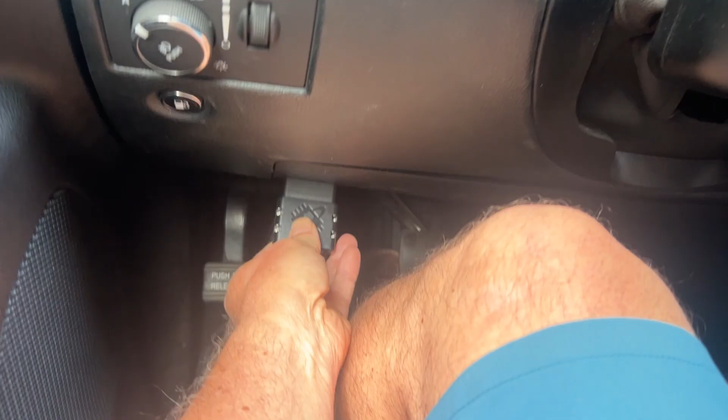Disclaimer, look this up for yourself, find the right one for your vehicle. When you get it, I expected a larger thing, but all it is is this, and it basically plugs into the little port underneath the steering wheel. Most cars have them down here.

I'm not going to put it in right now, but you'll find the port down there. Just plug it in. All right, there it is, plugged in, and for the first time setup, there's a small button on the bottom left. Press that button, it's right underneath the O letter, and that'll put the device into pairing mode for Bluetooth. Find the device on your phone.

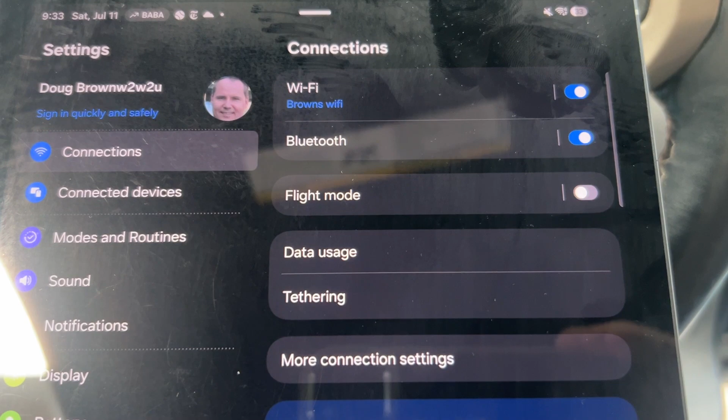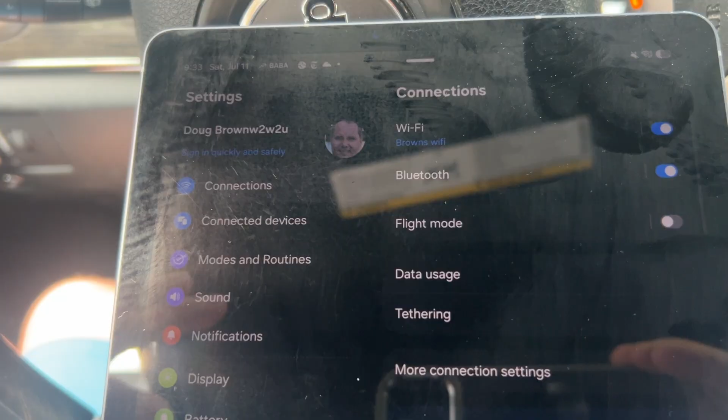You can read the device from your iPhone with the iOS operating system, and you can hook up to it, but you still need an application to access the ECU, the computer on the car. That application is a separate one that doesn't come with this device. You have to buy that separately, and I'll show it. Unfortunately, that application only runs on Android or on Windows if you want to connect to your computer via Bluetooth.

So I'm connecting here to my Android tablet, and let's see if I can find it in here. Find the device. There it is, OBDLink MX, whatever. Press it, and I'll connect to it, and I'll be online.

And then what I'm going to do is run the application that I use to start the manual regen. You can see the car's running right now. The instructions ask you to get the car to a warm temperature, because when you do the regeneration, the engine's going to ramp up to 2,500 RPMs, and it's better to have the car warmed up.

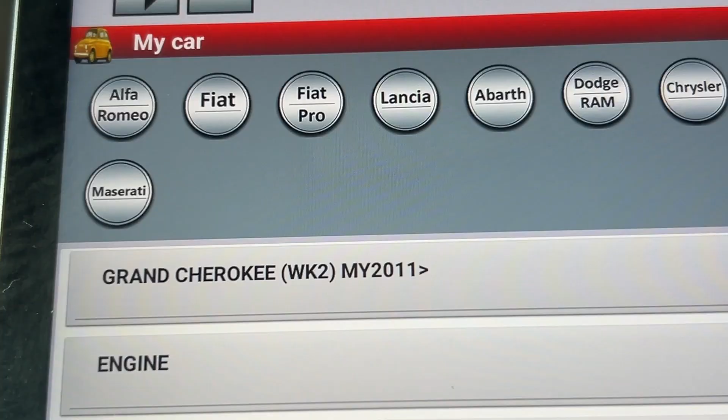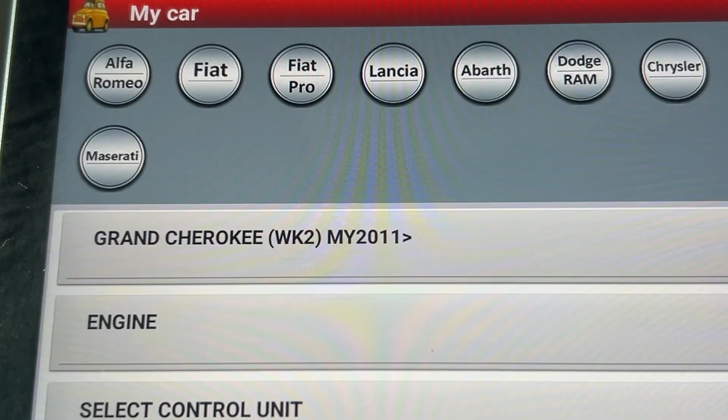The application that I found to purchase was AlfaOBD. It's my webcam going on, and I paid for it. It was talk about money. That device that I just showed you before cost me a couple $100 Canadian, and the application, this one, is $50 US. So the whole thing, all in, taxes in, 300 Canadian, which would be 220, 230 US.

The first thing you do is find your vehicle. You can select it through these drop downs here. Just go through and find your make and model. I'm not going to show that.

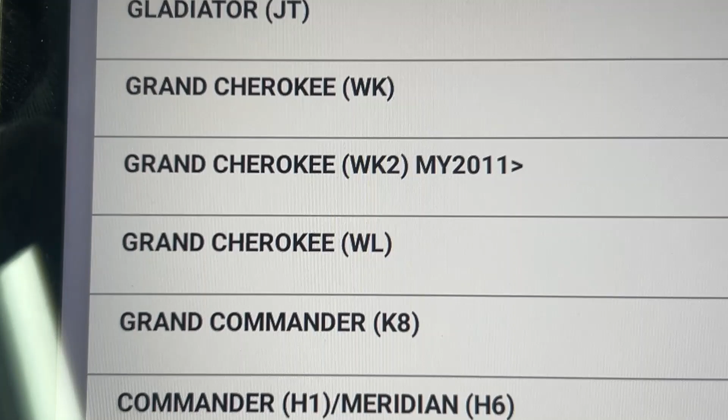Actually, I am going to show the make and model for the Jeep, because the application is not completely up to date with all the different models that are out there. So I was confused by this one, the Grand Cherokee WK, WK2, etc. I used AI. I just went on and said, here is my specific car, and I might even put the VIN in to say which car should I select in the AlfaOBD application, and it told me to pick Grand Cherokee WK2. It's fine, so I've done that.

And then you get to the point, select function. What do you want to do?

This is where you're going to want to do the manual regen. So you select the function, and there's all this stuff in here so you can control all aspects of your car, do whatever you want, or take a look. But I'm going to go to the engine and select the control unit.

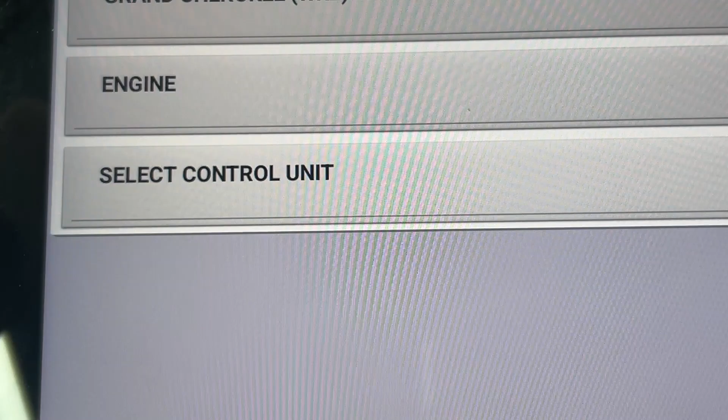My car was specifically not in here. I looked at AI, and it said to pick the one with this Italian engine, which is not on here. So I said, okay, that engine doesn't exist on AlfaOBD, what should I pick? And it said pick the EcoDiesel Bosch EDC 17. So I picked that one — that's the engine control unit.

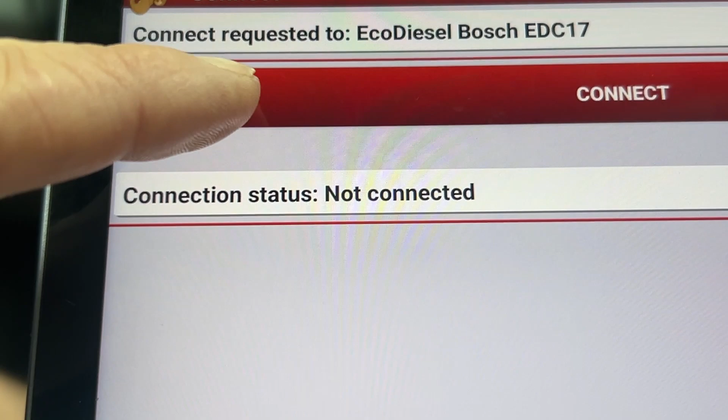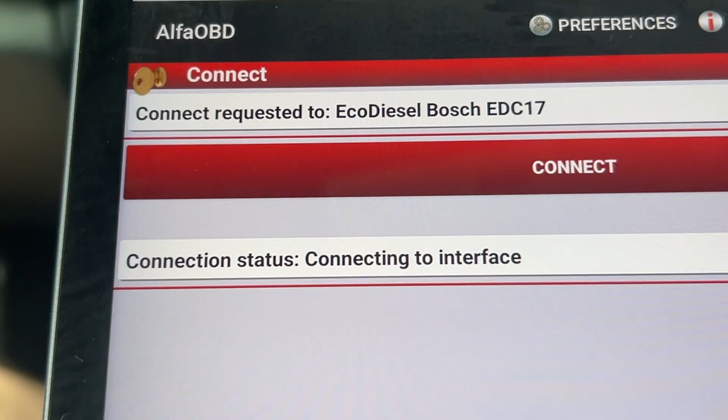Connection not connected, so I need to connect now. Just do that, and it's connecting to the device, the OBD — it will do that momentarily. It's connected, great. And of course, as I showed before, you connect your device to the Bluetooth connection for the device down by the steering wheel, and then your app connects to the device, which is what we're showing here.

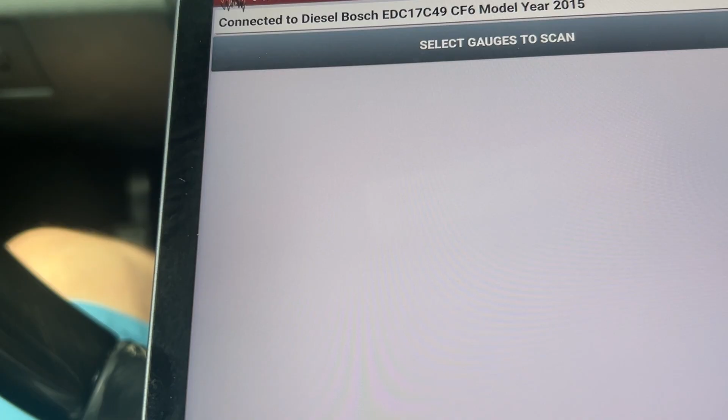On the bottom of the screen — and this wasn't clear at all — you can set up some graphs. Do that first. You want to set things like RPMs, track the engine temperature — or actually not the engine temperature, but the temperature of the exhaust coming out of the diesel chamber. You can also show a graph of the percentage of soot level in the chamber. So I'll go through and pick those.

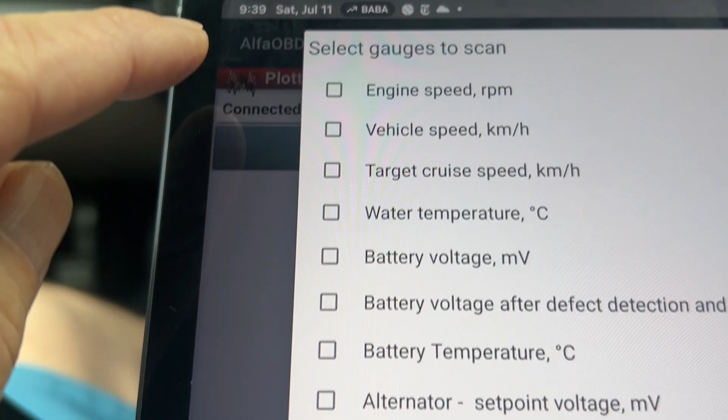So I'm picking here — select the gauges to scan. You just click this, and everything comes up. You can pick whatever you want; I picked ones that were interesting to me. Engine RPMs, I wanted to see that. Water temperature, I think that'd be the coolant temperature — I'm interested to track that. And you can see all the other stuff in there.

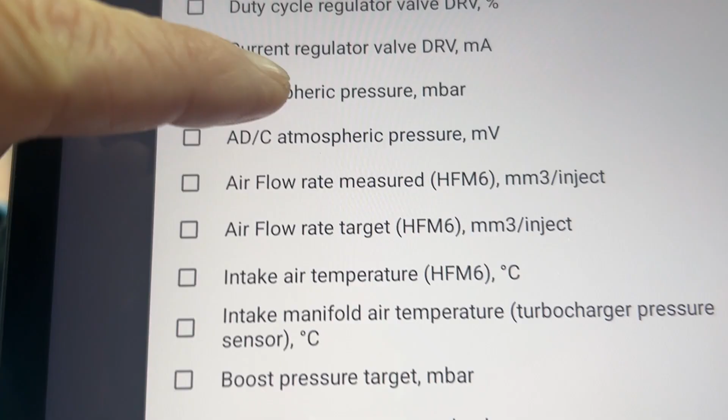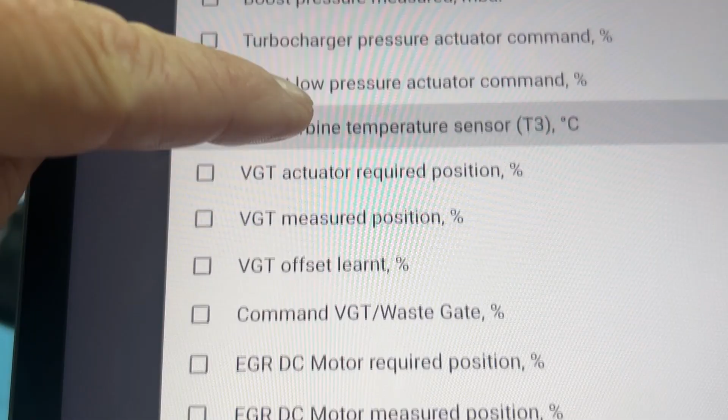You can see, if you want, you can get super detailed on all kinds of things, depending on what your problem is. I'll take intake air temperature, why not. I don't know what most of these things are, in fact.

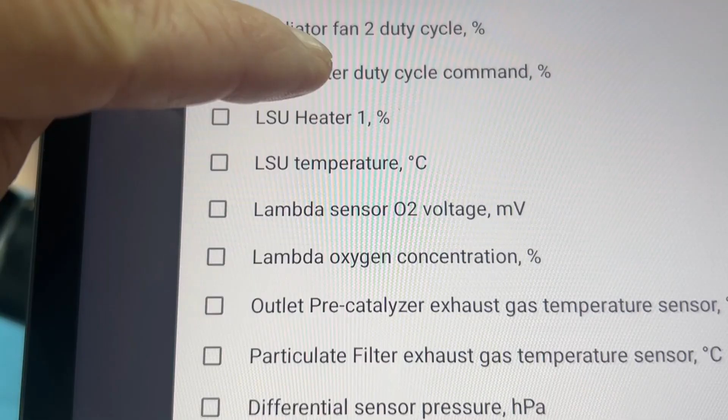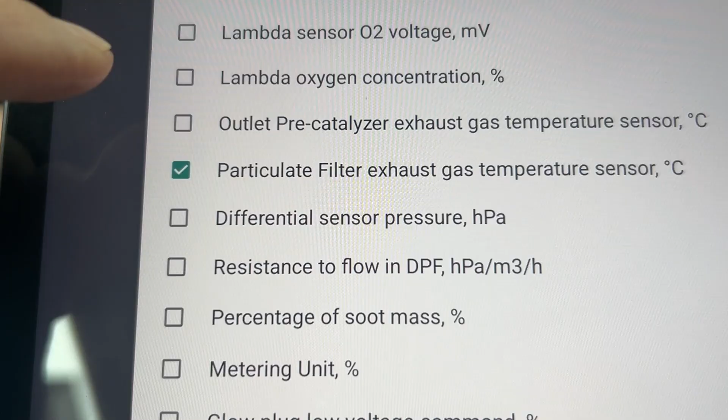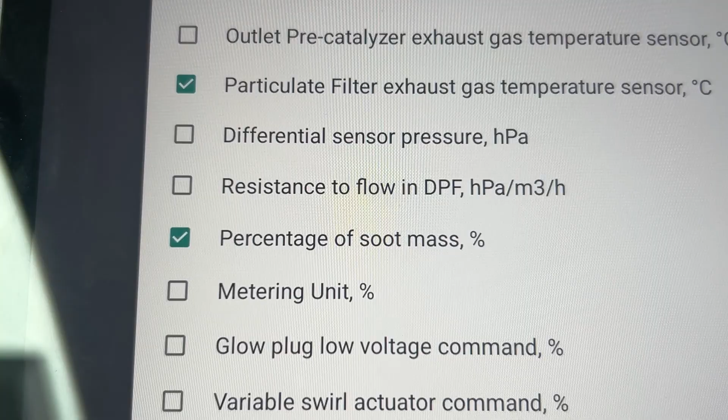Okay, particulate filter exhaust gas — that's going to be the temperature, not exactly of the chamber, but the temperature of the gas coming out, which you could say is a proxy for the temperature in the chamber. And then there's percentage of soot mass, which should be the fill rate of the chamber. Okay, when you're done with that, just hit okay at the bottom.

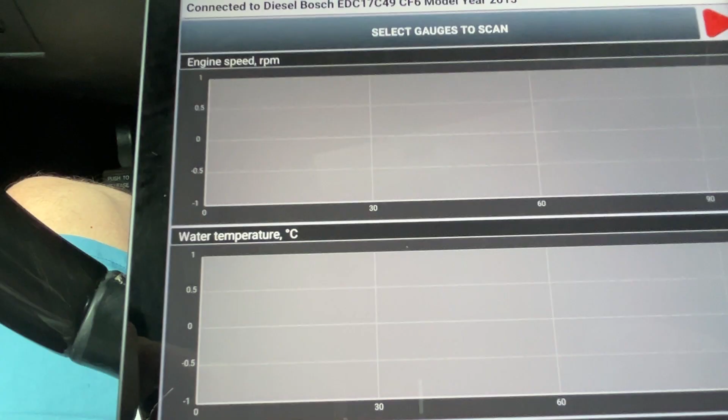All right, and there are the three graphs. When you start the regen, these graphs will fire up. What you want to do is, there's the graphs there — this is the actual procedure you're going to run, so press that, and that will bring up this menu.

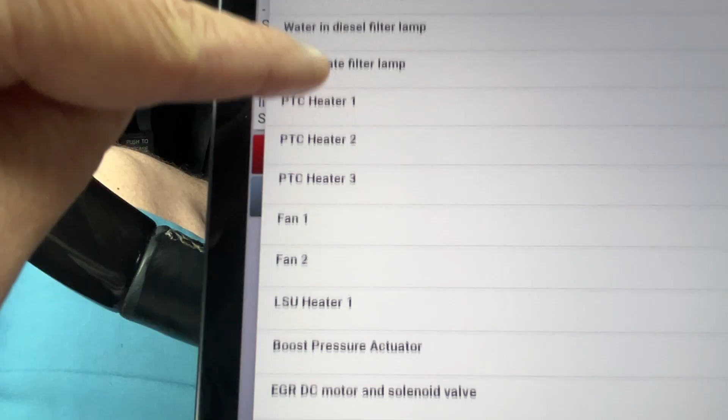So what do you want to do? Select the procedure to start. We're still on engine, so you can go through all the procedures you can run on your engine. I'm going to look for one that relates to the regeneration. There it is — DPF, diesel particulate filter regeneration enabling.

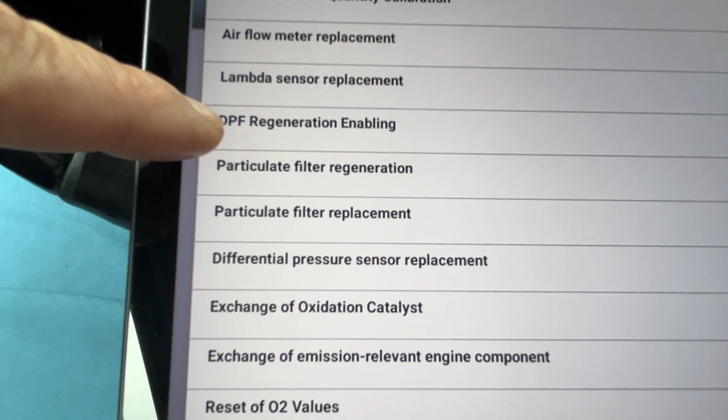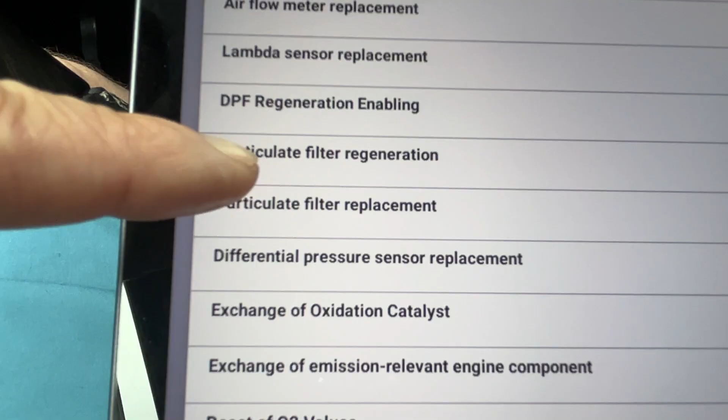What that's doing is setting your car to automatically burn off the soot, so that should always be enabled. And there's particulate filter regeneration — that's the one I want. Then start. The car is warmed up, you can see the temperature approaching normal running temperature, and let's see what happens when I press start.

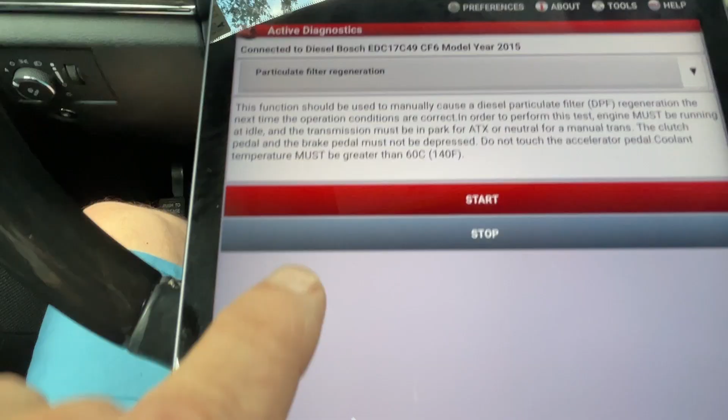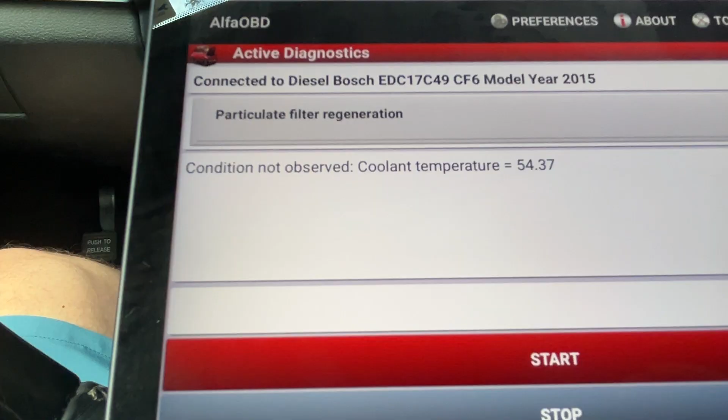Condition not observed - coolant temperature is not warming up. So I've got to let this car warm up even more. Back to the gauges, I'm going to start the gauges up. You press the little arrow.

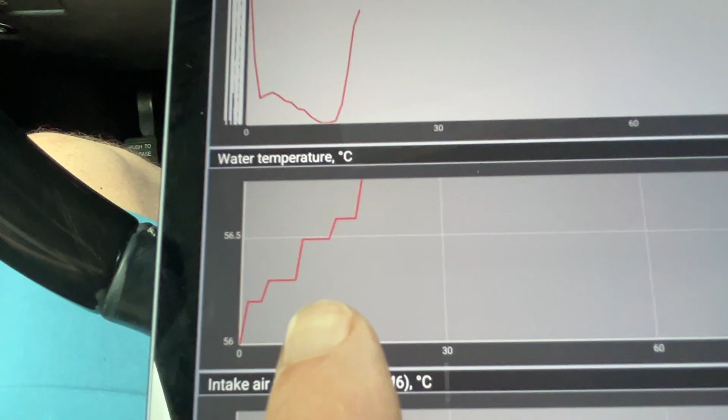And then I should start to see some numbers. So I want the water temp - I'm thinking the coolant temperature is the water temperature over here, and you can see it start to roll up. I pressed the gas pedal. You can hear it going up, and you can see the water temperature increasing.

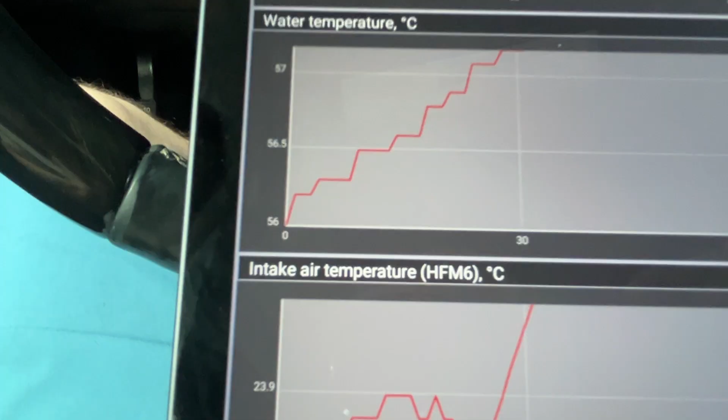Let me see, it's at 57 degrees right now. I've got to get it up to whatever it said before, 54. I think I'm high enough right now.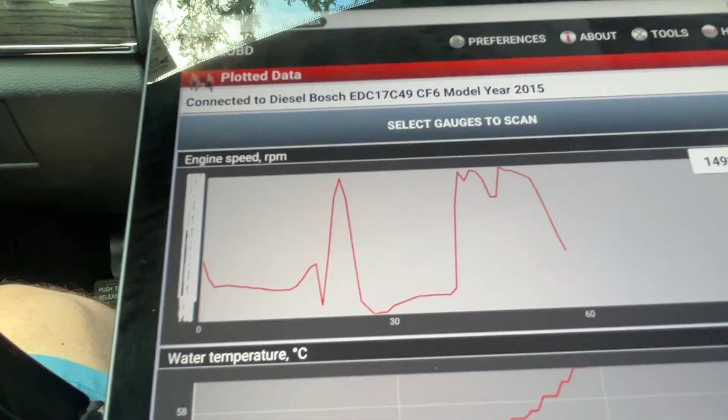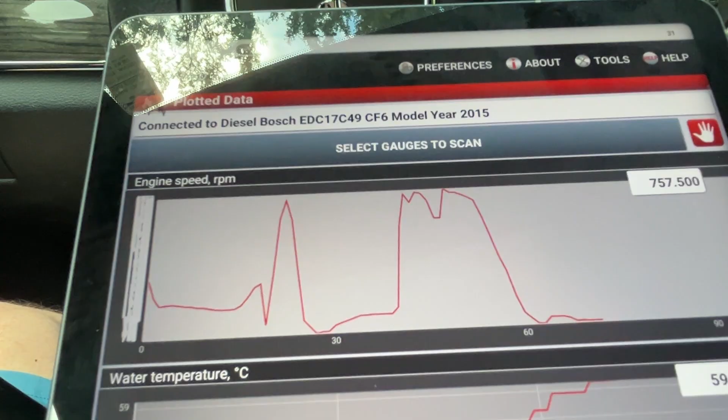Just out of interest, there's the RPMs. I'm pressing the gas pretty hard right now and getting the RPMs up to 2,500. When I'm not in gear right now - when I am in gear on the highway, I found I don't get it up to, I get it to about 2,000 RPMs when I'm at highway speed. So what you could do if you wanted to do this manually on the road, drop the gear down to a lower gear so the engine's working harder, and that'll get the RPMs up if you want to do that.

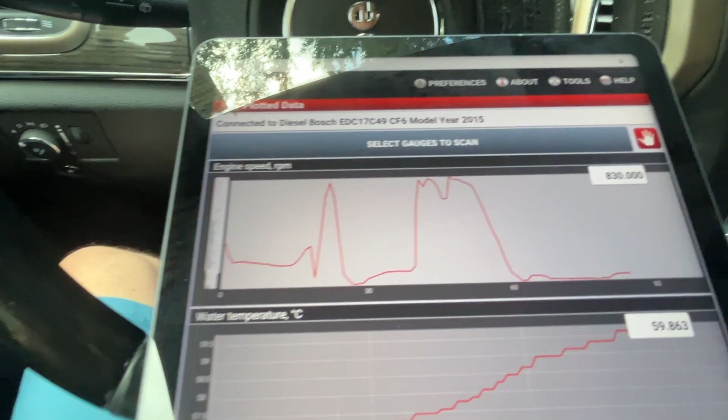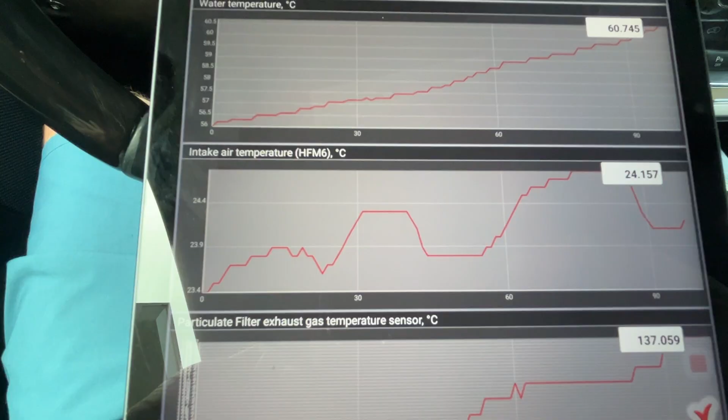Anyways, there's an example of the graphs. So engine speed, you can see as I crank, put more diesel into the motor, the RPMs increase. You can see the temperature going up. The intake air temperature has gone up a little bit. You'd think it would be flat though, because it's intake air coming in.

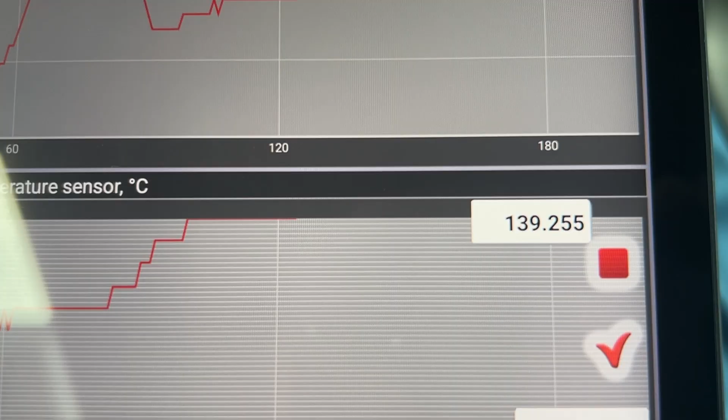And there's the particulate filter temperature. This is going to get - it's right there, it's 139. It's going to get really hot, actually, when you start the regen, because the engine will heat the particulate filter up, and when it gets hot enough, it'll be like an oven and just burn the soot off.

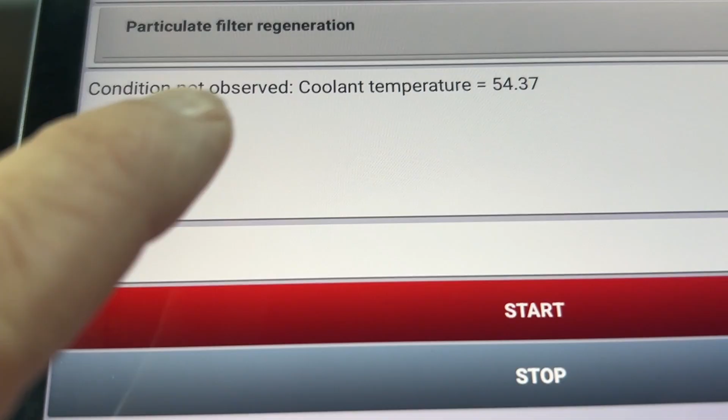All right, I'll try this again. I'll take my foot off the gas pedal. So the condition was not observed before - the coolant temperature was too cool. I think it should be hopefully warm enough now, but this sensor will tell me.

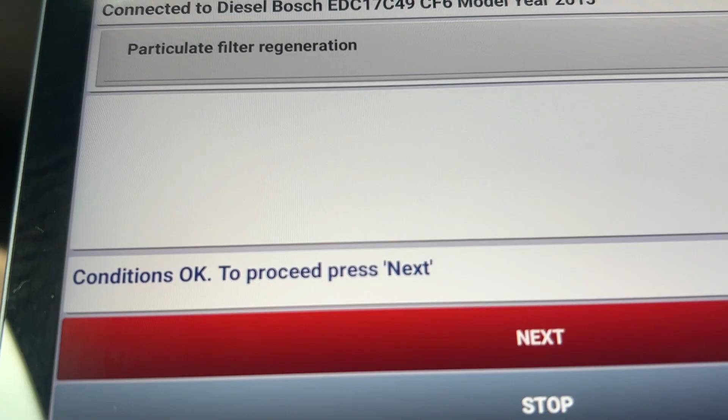Conditions okay, press next to continue. And then you can hear the engine ramp up. There it goes. So that is the application taking control of my computer and increasing the RPMs, and hence the temperature in the particulate filter chamber.

So this is going to run for however long it takes, 10 minutes, 15 minutes, 20 minutes. And when the soot level is reduced, the engine will automatically reduce in RPMs, and you can tell that right away. Yeah, it just really cranked up there to 2,500.

Going back to my menus, I'll go back to the graphs, and you can see there's the engine RPM speed. Water temperature continues to go up. Intake temperature continues to go up. And there is the temperature of the particulate filter. You should see that continue to go up, actually.

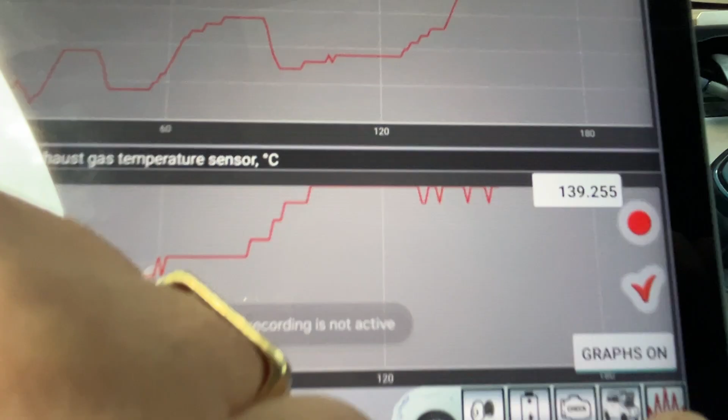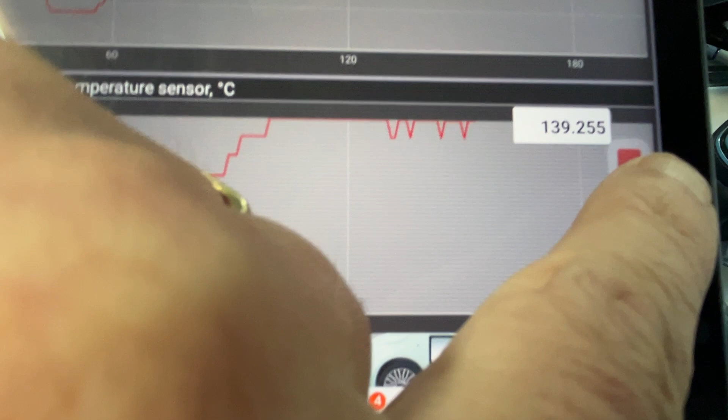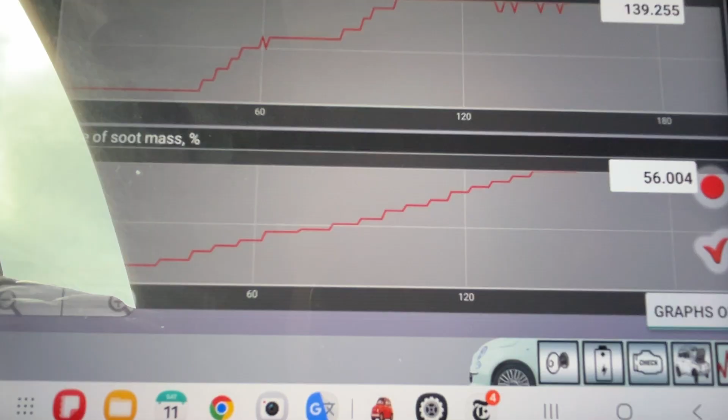I don't know, honestly, I don't know what I'm doing there with these flashing things. I'm just wondering why it's not - oh, data recording stopped. Okay, I was recording there. I was hoping to see the graph of this continue to go up. I'm just hitting the plus minus thing.

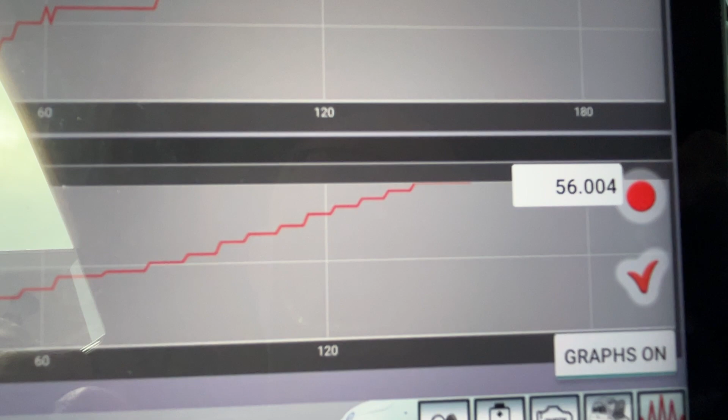Oh, that's the percentage of soot mass. So it's at 56% right now. And when I did this before, I did not see the percentage go down. When the engine RPMs went down to normal and the burn off had completed, this went down all in one go to 10% or something.

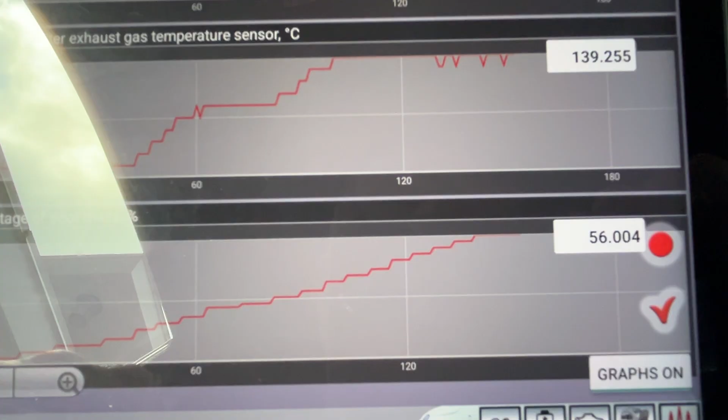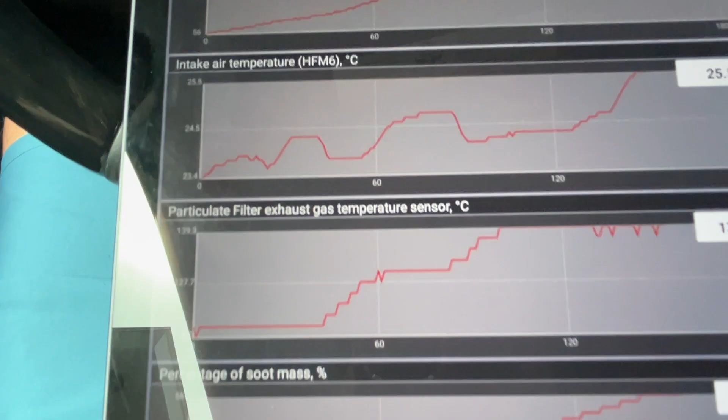And then I actually did this a few days ago, and the particulate warning came on again to drive at high speeds in the engine. So I'm doing this just 3 or 4 days after I'd done a manual regen earlier. So I might have to do this a few times before it's working.

Okay, so there's - and the engine speed does not appear right. It should be 2,500 RPMs. So unless this reading is out of sync somehow with the car, that does not look correct to me.

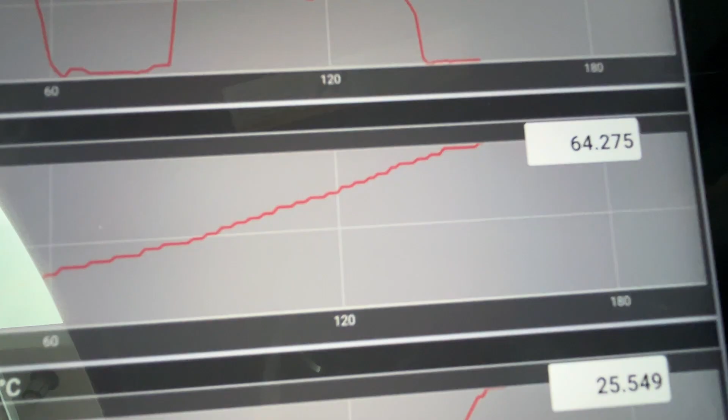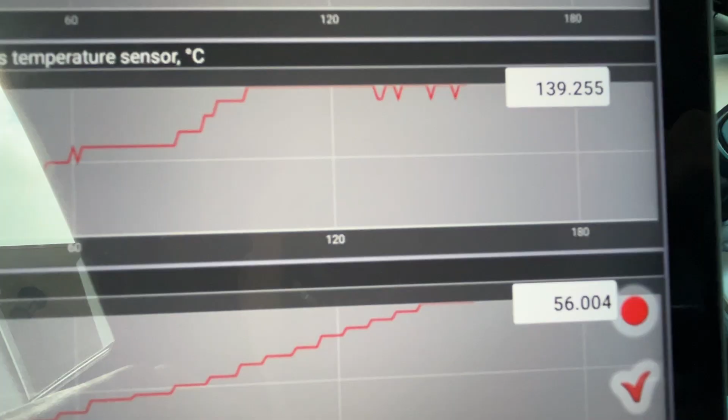I don't know why. Water temperature continues to go up, and then it'll peak out at some point. Intake air temperature kind of seems to have peaked out. The temperature of the chamber - it should be getting a lot higher than that, actually. I'm just pressing the on-off button on the gauge on the top.

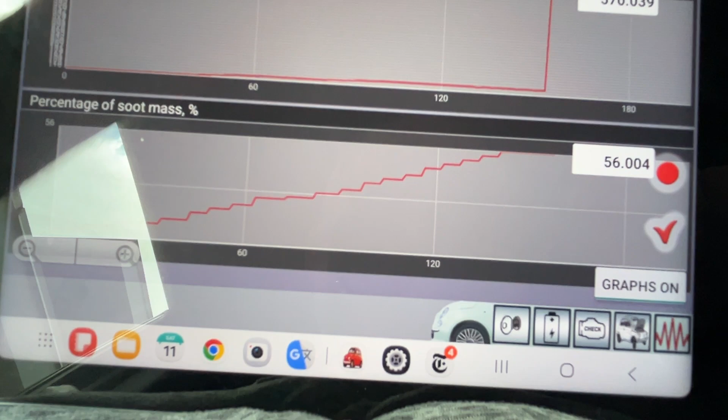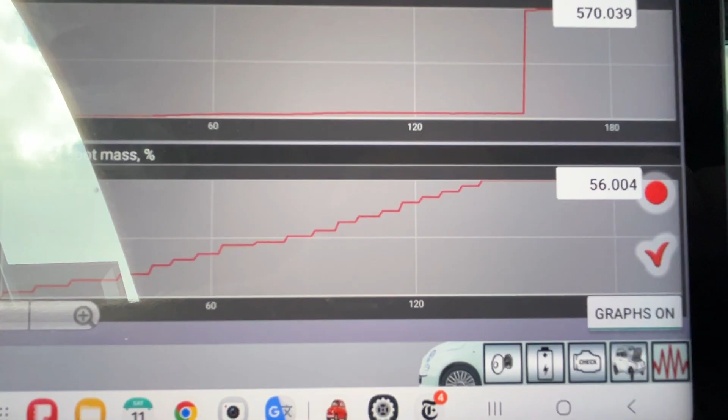Anyways, I can't explain that. It should be getting a lot hotter. I'll turn this off until the procedure's over. Just out of interest, the RPMs did come up to exactly what it reads on the gauge on the car, 2,500.

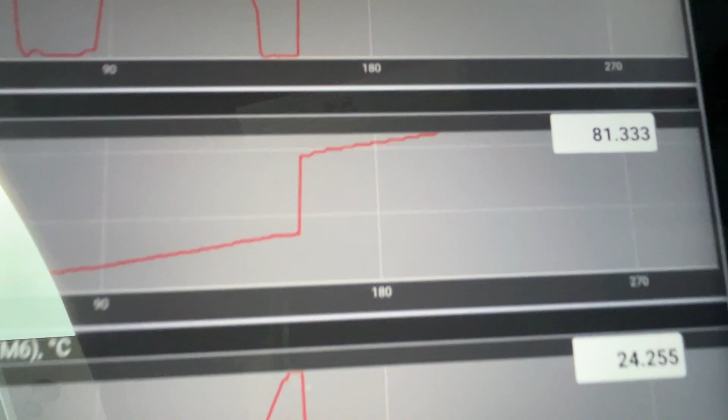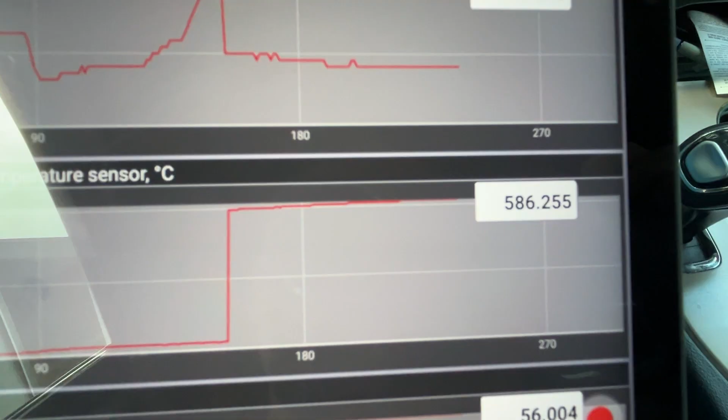Water temperature, 81 Celsius, right there. Intake air temperature's come down. Probably a valve opened up. Particulate filter, there's the temperature, much better now, 586. I think when I was showing this before, it just hadn't done a read. The device hadn't done a read of the ECU, which it did now, and you can see it's 586 Celsius, so it's hot in that chamber.

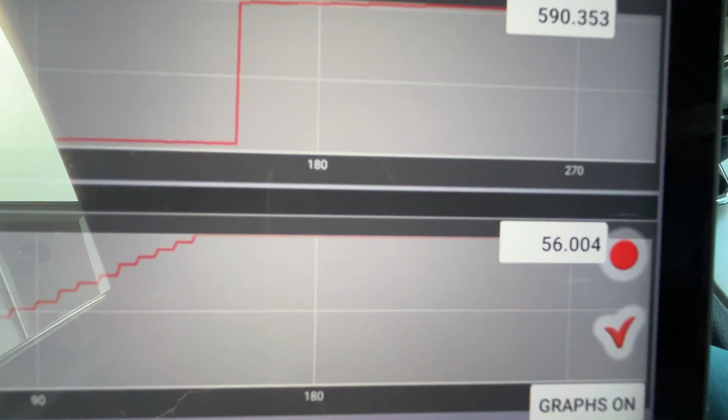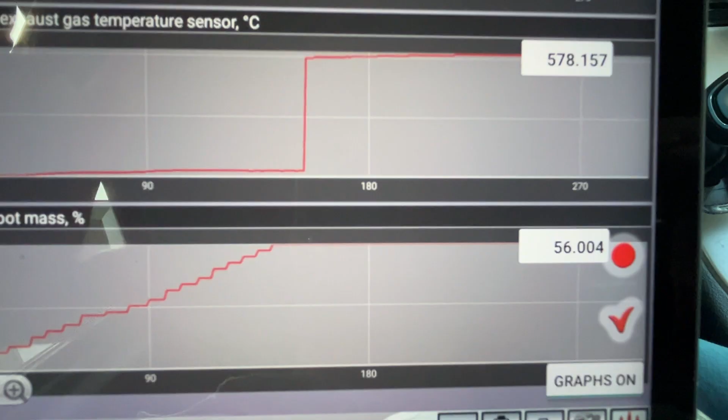And then the particulate is still reading maybe a little bit lower than what it was before, but it's still showing 56. I think, this is all speculation on my part, that the chamber needs to get up to a high temperature, and it needs to sit there for a while before the soot starts burning off, okay? I'm not sure about that, but as I said before, I observed that this graph did not show the decline in the percentage until the whole procedure was finished. But anyways, like I said, I'll let this sit for as long as it takes.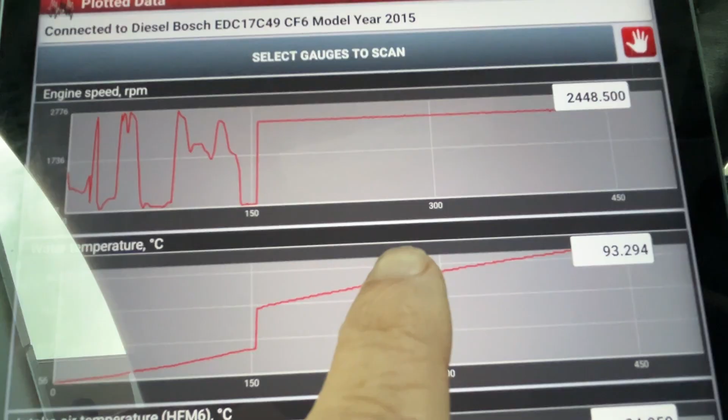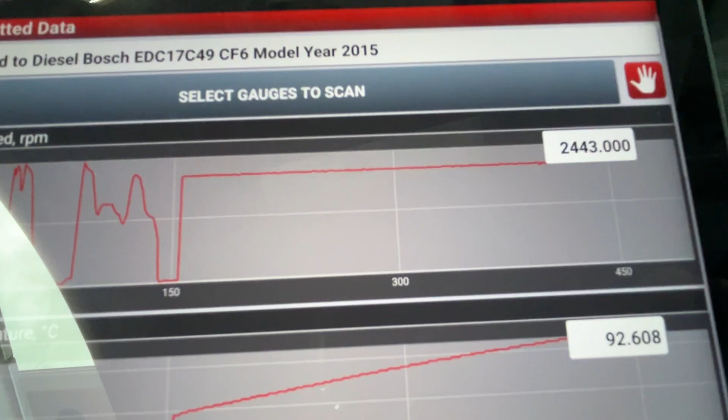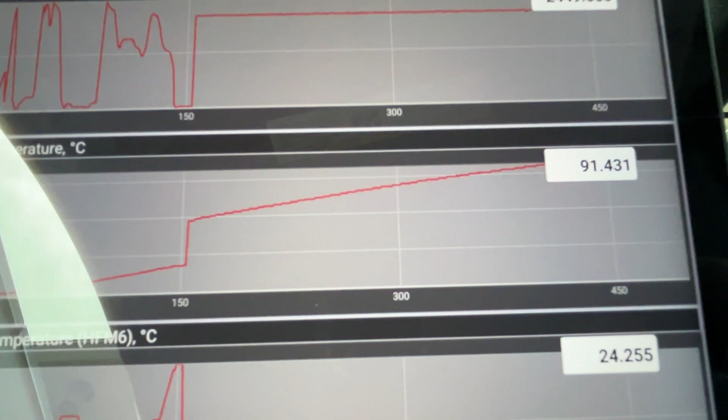The application reads the ECU about every second. So you can see 150 seconds, 300 seconds, 450 seconds, and you can see the top one. This is the RPMs maintained at 2,500 RPMs. This is the water temperature maxing out because valves open in the coolant circulation system to keep the engine cool. So you'd expect that temperature to go up, and then just to max out as the radiator, etc., does its job. There's the intake air temperature, so that's, as I expected, pretty consistent.

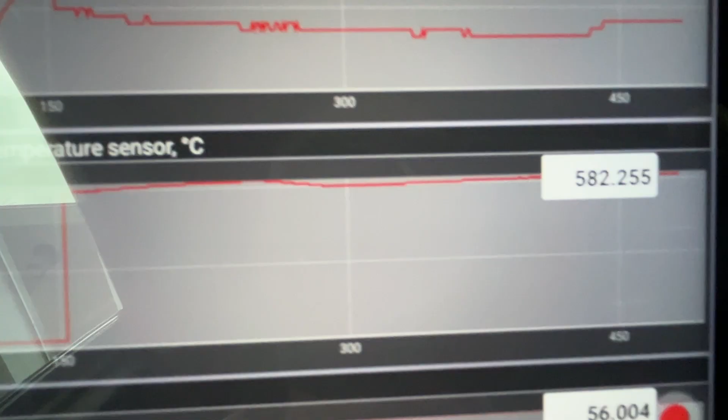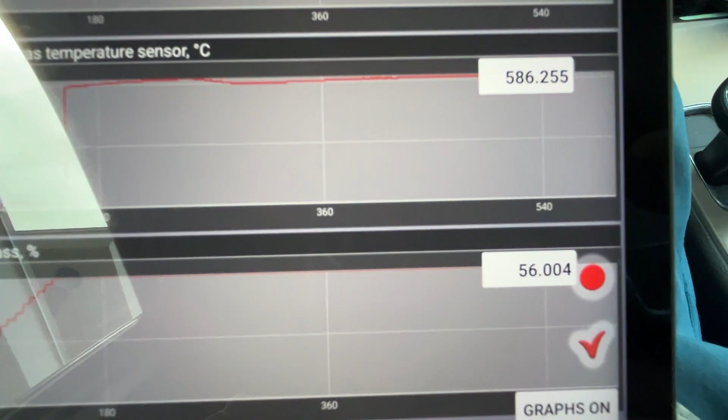I do think the air coming in was quite hot, and then a valve opened up or something, and then the air intake cooled down. And then there's the particulate, that's the temperature of the chamber. It reached a max of about 582, and then stayed pretty consistent. That looks like its max temperature. And then the percentage of soot is maintained at 56. So it looks like either that's true, it is maintaining at 56 because the soot's not burning off yet, or it just doesn't read very well while the thing is so hot.

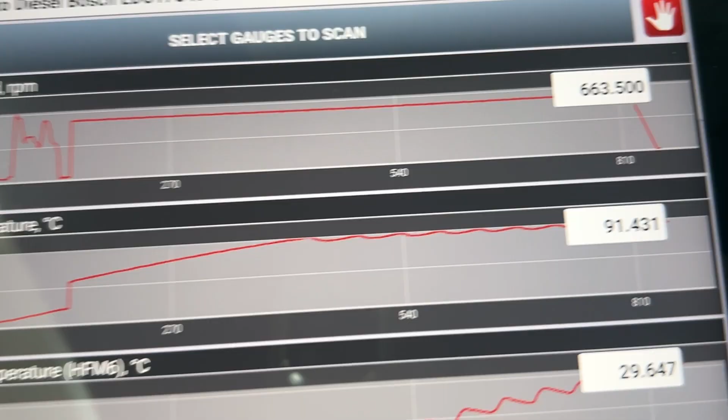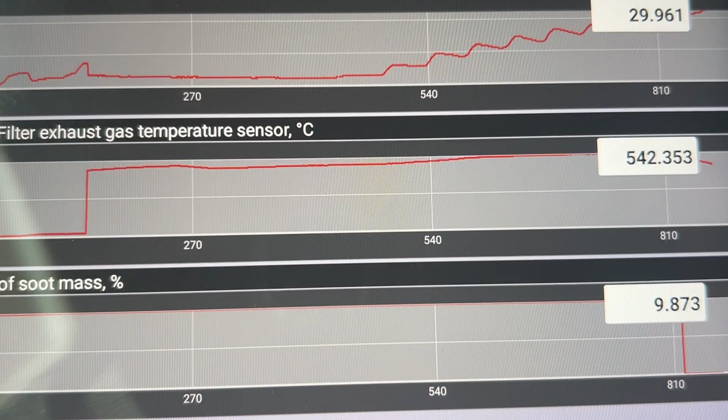Just came down, you can see on the gauge, and you can see what's happening here. So the RPMs have come down to 660, water temp stayed at 91. It'll stay there because that's its operating temperature. Intake air temp pretty consistent. Exhaust gas temp 520, and you can see it's starting to fall off there on the right because the engine's not at high RPMs any longer. And then there's the percentage of soot mass. It says 9.8%. So hopefully we've brought that from 56 or whatever down to 10, and this thing is better.

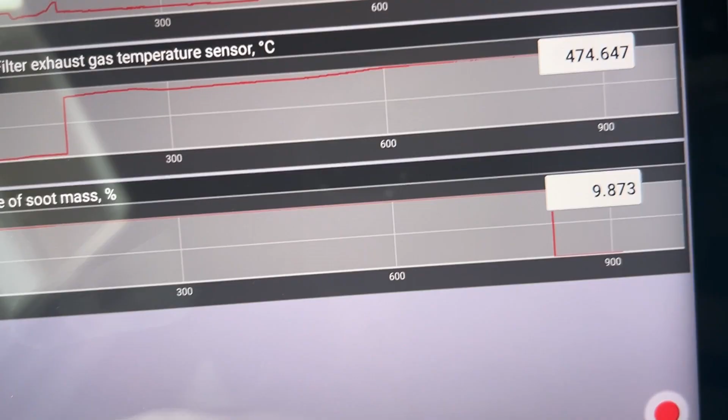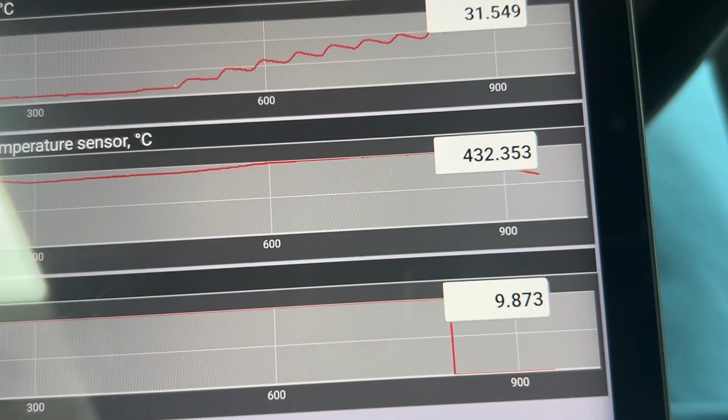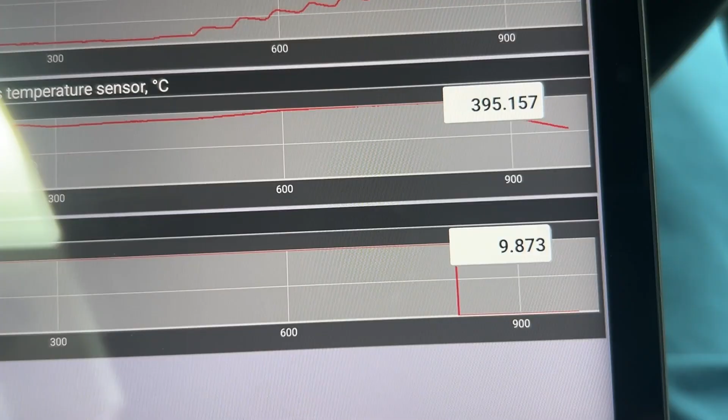So like I said, I did this 3 or 4 days ago, and that 9.8% went back up to 58. I don't know if that was true, or if the reading was just a bit incorrect. But we got the message on the dashboard to drive at highway speeds just 3 or 4 days after I did this manual regen. And that happened all the time when I would take this into the mechanic. So I just think it's a real problem with these older diesel engines in Jeeps, quite honestly. I know that they're a problematic fit of the European engine into the electronics and the chassis of the American-made Jeeps. So anyways, that's about it.

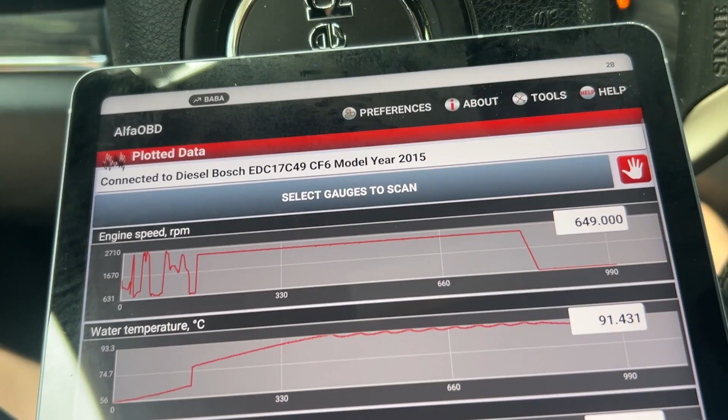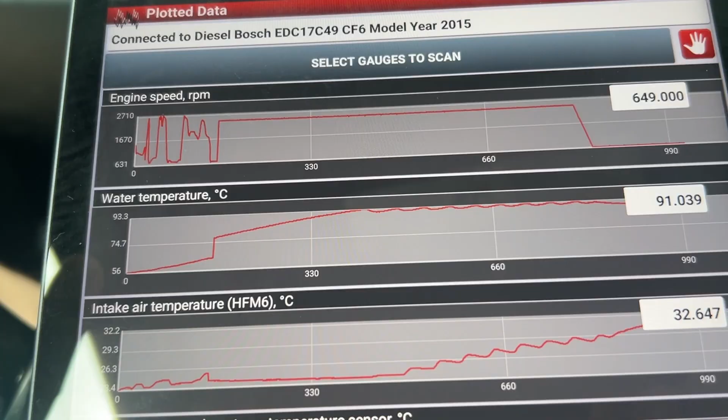I did this video because I found I couldn't get good videos on YouTube or the internet. So I decided to buy the Bluetooth device. That worked great. I got this app, which worked great, only on Android. And then I was able to just tinker with it until I figured it out. So I did this video to show other Jeep diesel owners what to expect and what to do. So I hope you all find this interesting and that it works for you.